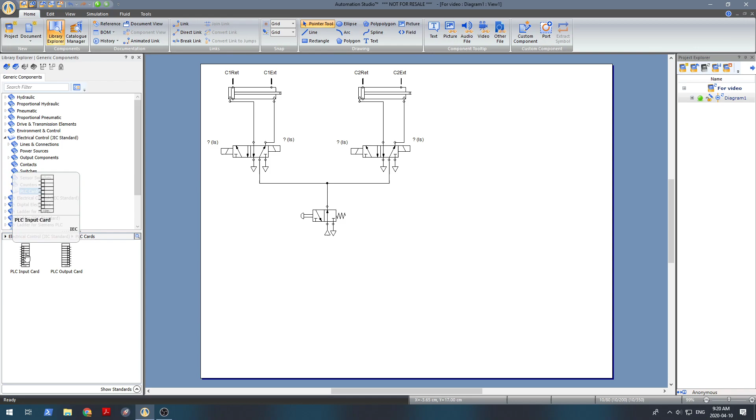To complete this control circuit, we're going to need to go into the electrical control menu, open it up, go down to the last option, and select PLC cards. These are the cards that are going to allow our PLC to interact with our other circuits. So we're going to pull out an input card and an output card.

Next, we're going to set up power and ground. For these cards, we're going to connect the common to ground. We're going to pull out 24 volts for our power.

Now, we're going to set up our input and output components. For inputs, we have 3 push buttons, which I'm going to name 1 through 3 for the sake of simplicity.

Now I'm going to hook these up to power, and just do a little rearranging to clean things up. Now we're going to take the rest of our inputs and connect them to ground.

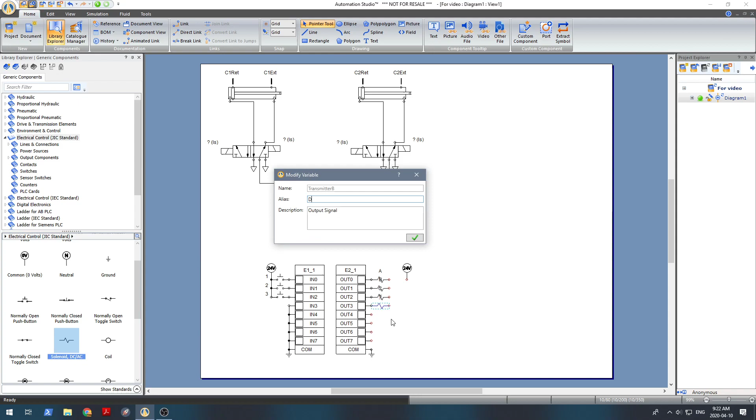Again, we're going to hook these up to power. Next, we need to look for an indicator lamp.

We're going to go into electrical control, to output components, expand that, and go into signaling devices. I'm going to find this indicator light, and I'm just going to call that lamp.

Also connect that to power, and then we're just going to do a little cleanup. Next, we're just going to take our unused outputs and connect them to ground.

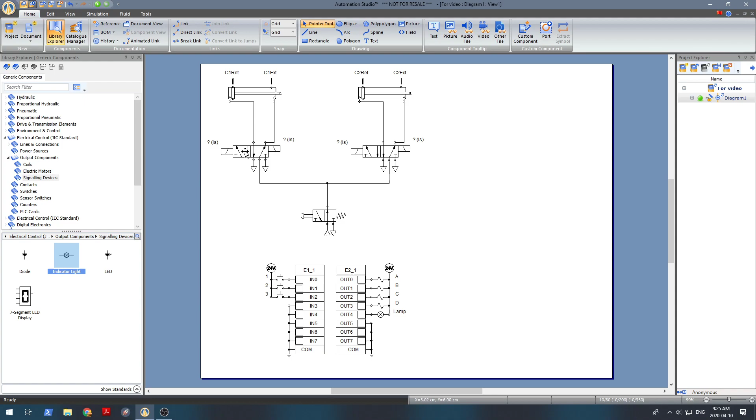So here, we're going to select this solenoid, or this valve rather, and we're going to take a look at these input signals it's requesting. Here, if we hover over, we can see this is for solenoid 1 of this valve, which is called P3-1.

So now we're going to select that, and then we want that corresponding with our first solenoid, which we named A. So we're going to double click A, and then that's going to associate.

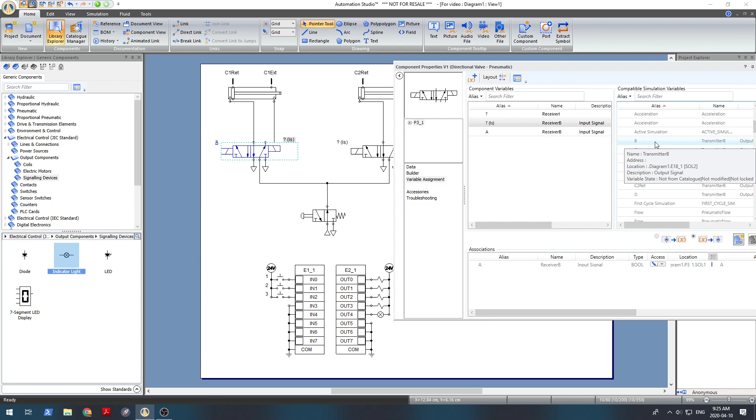We're going to do the same for our second, and we want it to be associated with B. And we're just going to do the same for our other valve here.

Again, hovering over, we can see this is for the first solenoid, so we're going to connect that with C.

If you accidentally make a mistake like that, you can go here and hit break link, and make sure you select the component you want to link and double click.

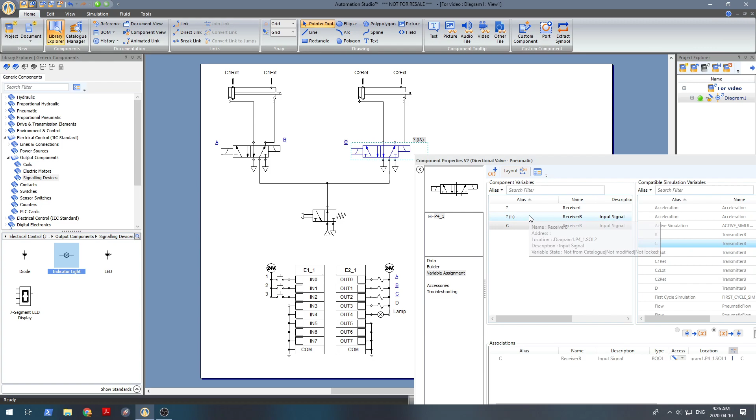And there we go. We've associated these solenoids with these valves.